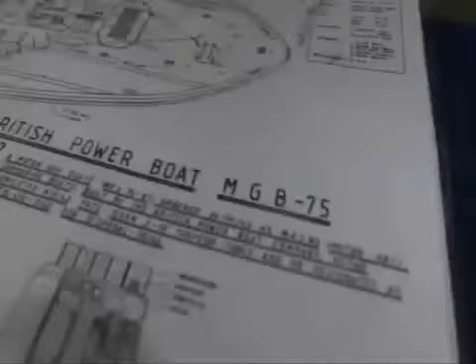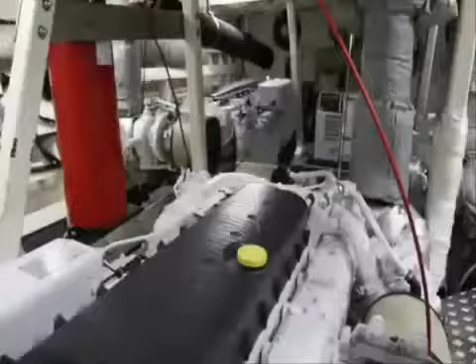Today we are testing MGB 81. She is an original World War II motor gunboat built by the British Powerboat Company to go out and defend the British flotillas against attacks from German E-boats. The original engines were Packard engines built in the US of around 1,500 horsepower each. They were supercharged petrols. She's now been fitted with triple FPT C13s, new diesel engines.

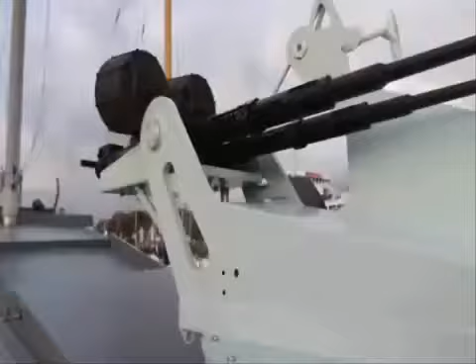It's the classic Hubert Scott-Paine design with the beautiful sloping decks that help give it the rigidity it needs to perform. So it's beautiful, it's fast, and it's heavily armoured too. These were the gunboats, not the torpedo boats. So we've got a big 3-pounder gun on the foredeck. We've got the twin Oerlikon machine gun on the back, and then these two lightweight Lewis guns either side as anti-aircraft.

More welly. Again, it's a very physical experience, and now there's another second boost at about 2,000 RPM. You can really feel it starting to charge. We're doing 27, 28 knots now. We're still building. It'll go all the way up to 30, 31 knots, and now the rudder's really weighting up. It's proper physical effort required, and the turning circle, it's about 100 meters wide at this point, so it takes a brave man to go in and attack a battleship on something like this.

The way it can maneuver when a bit of a sea is running gives a fair idea of its capabilities.

This is the aft gun on board MGB 81. It's a pair of Oerlikon heavy caliber machine guns, and then there's the main gun on the foredeck, which is the 3-pounder. It's not a huge combat caliber, we're not talking a massive battleship gun, so you need to get in close. And when I say close, we're talking about within a couple of 100 yards.

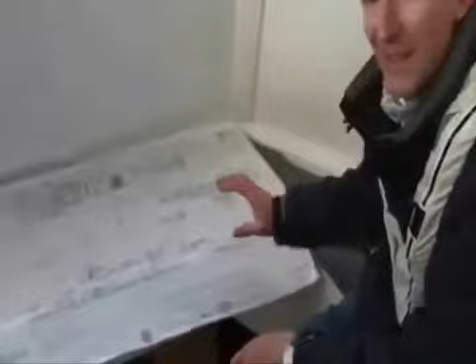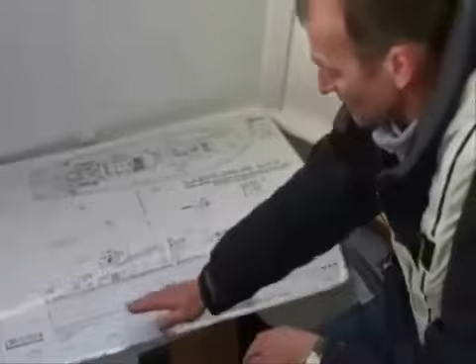You can see a little bit from these original plans how the hull shape came together. So you've got a relatively deep, narrow V up at the forefoot, and it flattens off aft to give that planing surface, which is what gave it the speed. It meant that they weren't terrific sea boats, in all honesty. They were built for speed. So with that flat stern, they would bang a bit. But it did mean that they planed relatively early and they went quickly.

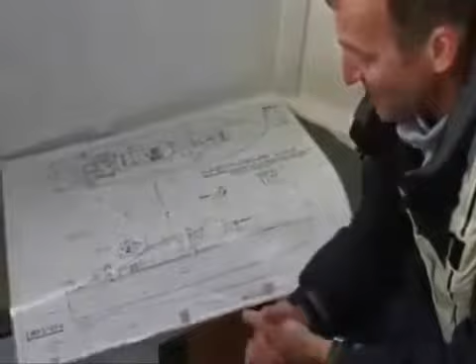I think with the original engines, they were good for certainly at least 40 knots. But you can see the triple shaft and propellers, the outer two which are on V drives, and the central one direct shaft, and 3 relatively small rudders, which is what makes it such hard work to steer at lower speeds.

And here in the officer's wardroom is a lovely little bit of history that tells you all you need to know about these boats. This steel plate here was an emergency repair made to the hull after enemy gunfire ripped through this relatively thin mahogany outer casing. The gunfire ripped through, and in the space of 24 hours or however long it took, they rapidly patched it up with this metal plate. But imagine what it must have been like down here with gunfire coming through, knowing that right behind you are 3,000 litre tanks of highly explosive petrol.

It gives some idea of how basic the boat is and how brave the men must have been who fought on her. And for me, it's been an absolute privilege, and I hope what we've managed to do is convey some of the feeling and excitement of what it's like to drive this magnificent craft.

Life at sea brings the best out in a man, so they say. 5 minutes of this for me would bring a lot more out than that.